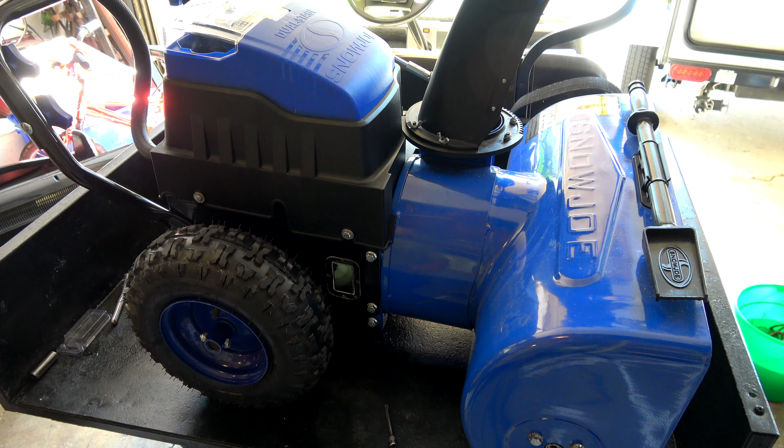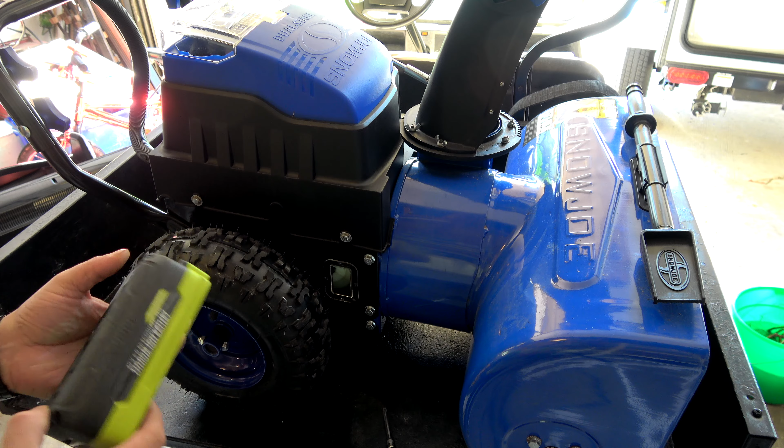We have here today the Snowjoe lithium 80 volt lithium powered two-stage snowblower, model number iON8024-XRP, which is the same as the XR, only includes 6 amp hour batteries instead of 5 amp hour batteries. The batteries are 40 volt, but there's 2 of them to make 80 volts. This 6 amp hour one is actually smaller physically than my old 4 amp hour ones.

So I just upgraded to this, picked it up off Facebook Marketplace. Barely looks like it was used. So I thought we'd open it up and see the mechanics, internals and whatnot. So let's see.

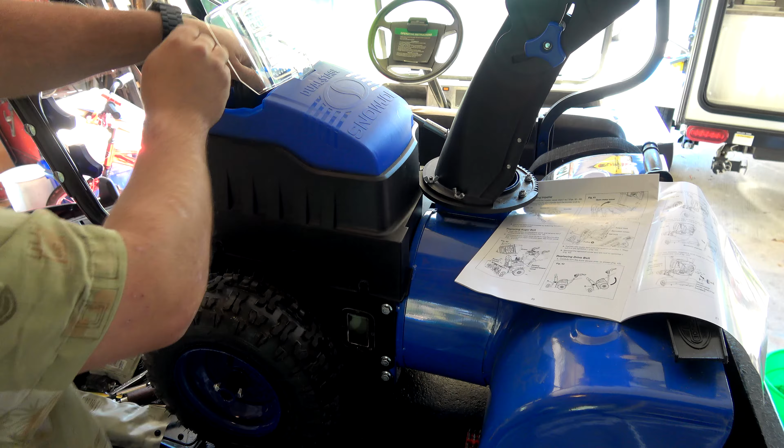I loosened some of these already. I'm interested in seeing how they attach things, how they convert the electric motor to turn the auger and the wheels. In the battery box, the springs that hold or put tension on the battery also have 2 hex bolts, requiring a 5mm Allen wrench or bit to open or remove. The owner's manual calls them screws, so I was looking for screws. I didn't see any screws, I saw hex bolts. They also referred to the bolts on the side as screws, which technically the thread is a screw, but they're not screws, they're bolts. So, remove those.

There you go. And then, now it wants you to remove the chute too, but I'm not going to remove the chute. This is plastic and it's not cold out, so I'm just going to gently move things over that way.

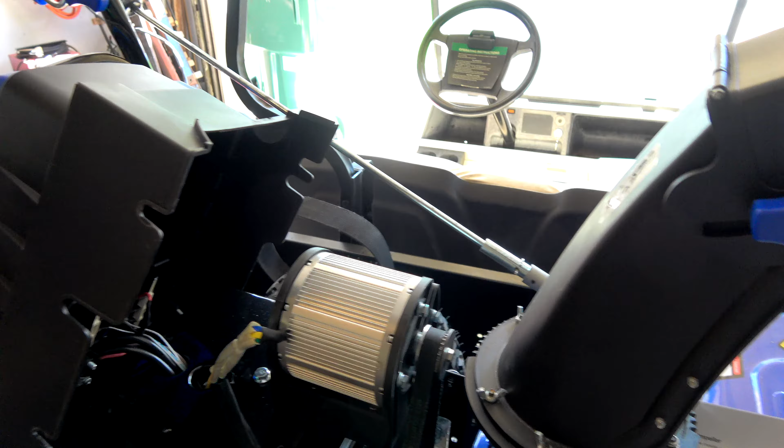Okay, and here we go. We have the different motors. Let's move the camera a little closer here, angle down, get a little more light. Alright, so what do we all got in here?

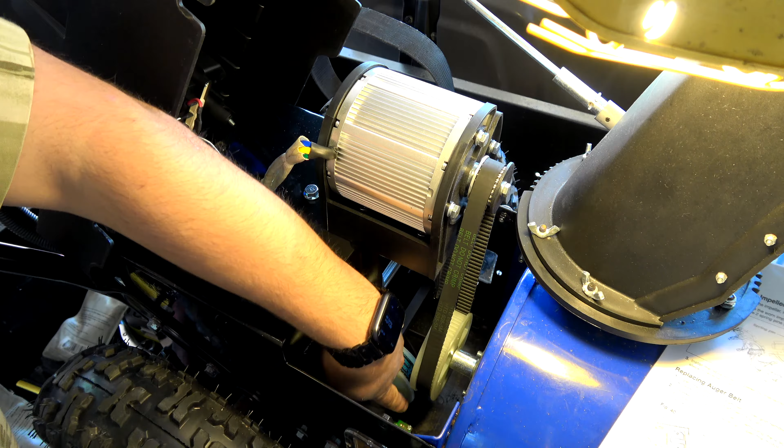Well, they got some pretty blue LEDs on the bottom, which won't come on now because I have the batteries out, which would be these little things right there. There's one on each side, kind of lights up, there's a little clear window here. I guess it's good so you can see if your belts are snapped. This is the motor, which is really kind of a nice motor, heat sinked, and remember it's going to be wintertime, so cooling - even though it's heat sinked, it's not very big heat sinks, but something better than nothing. Plus wintertime, cold, blah blah blah.

The pulley on the top appears to be maybe aluminum or zinc. Pretty good gear ratio there. Oh, it's a stepper motor, permanent magnet.

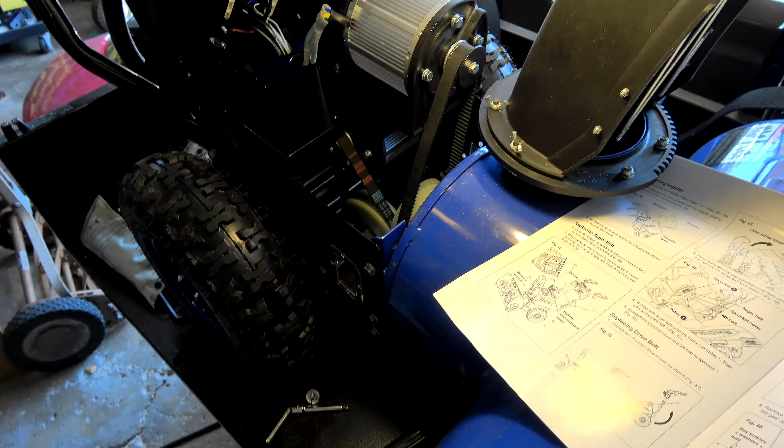There's another motor on the bottom, looks to be of the exact same kind. That one drives the wheels. However, the pulley on the bottom one is a little smaller, different gear ratio, gives you a little more torque. Whereas the top one needs a little more speed for throwing that snow a bit of a distance there.

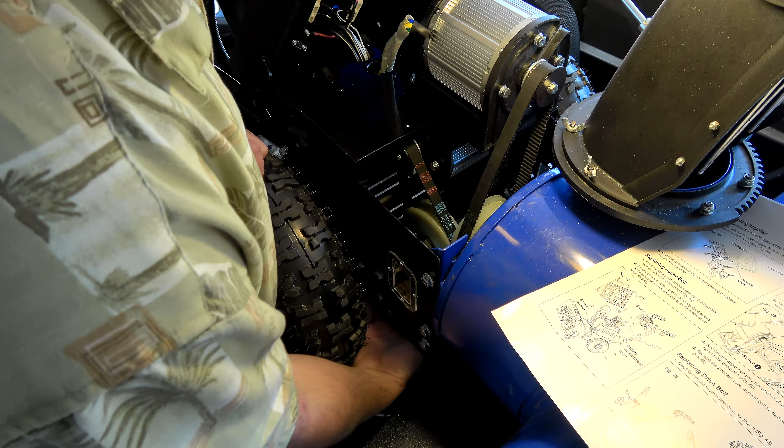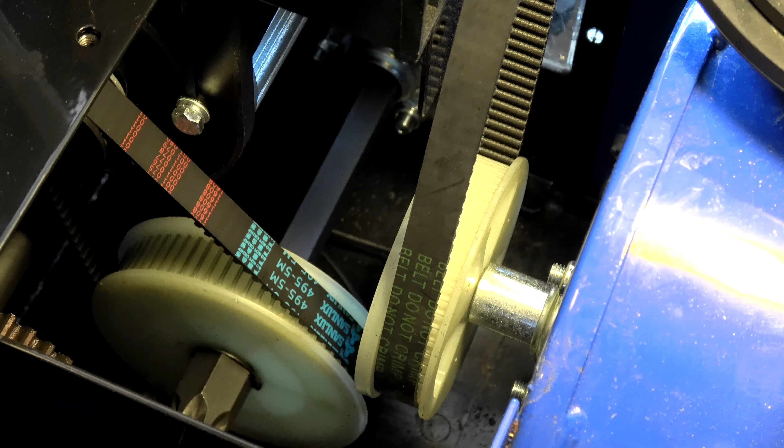There's holes on the bottom of the pan. Now, one thing that I'm not most impressed on, and I'll zoom in here, is the drive pulleys, or the driven pulleys, are plastic. Belt's a little sloppy too, but it is a ribbed belt.

Both of them are. The gears here are plastic, and they are held on by a simple bolt on the auger one. That does not seem like it will last. The bottom one seems to have a massive nut and some bars going through it. Get a good look there - that little green square is the LED to light this all up at night.

Now, the gear that's actually connected to the wheels is in fact metal, nice metal one, but the one going on the belt is plastic. I wonder how long that will last. Looks like some solid connections here, they're also hot glued. Zoom out. Belt replacement, so it would seem for the auger, is going to be pretty simple.

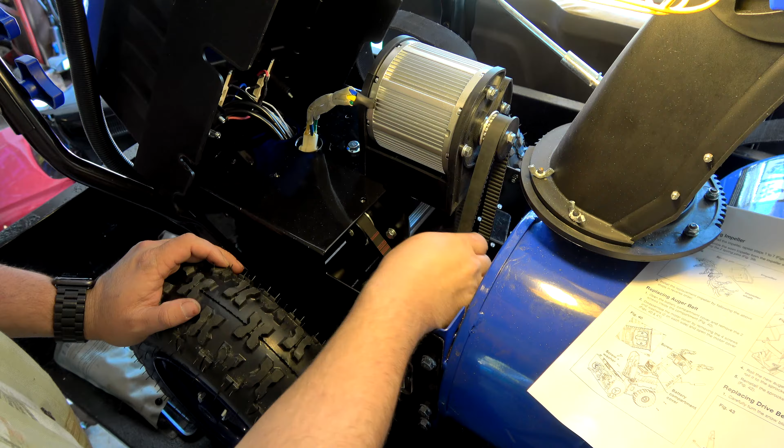Now I saw a lot of complaints about this unit, that the auger after some use will stop working. I can't comment yet, I'll have to wait for a snow day, and today's 66 degrees right now, so it's beautiful out.

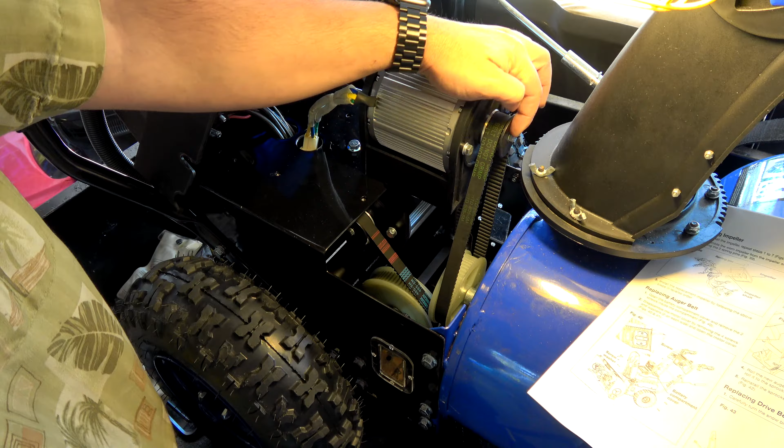So I'll have to wait until some snow falls to test that. Now my single stage Snow Joe also has a plastic gear on the drive belt, which hasn't gone out, although I am seeing complaints about that. What happens is there's a big nut in the middle - the drive one does have it - and if you hit something and stall out the augers, instead of the shear bolt shearing, the metal nut in the center of the plastic pulley or gear strips out and starts rotating, and then it's junk.

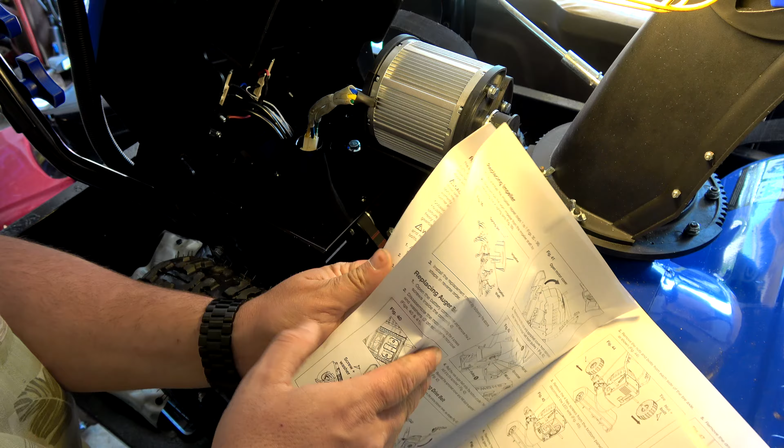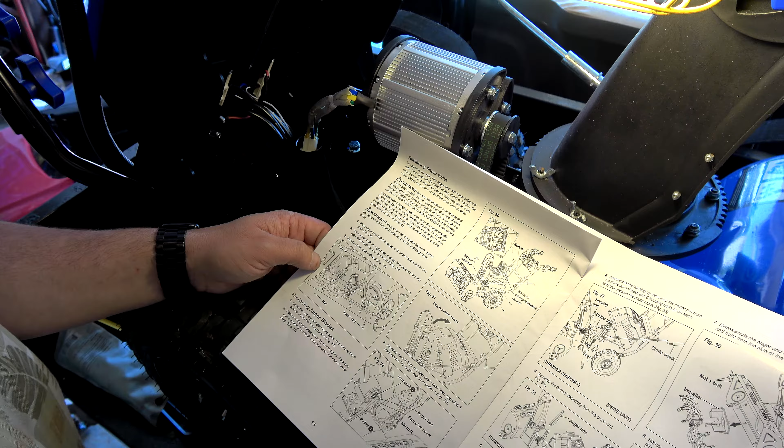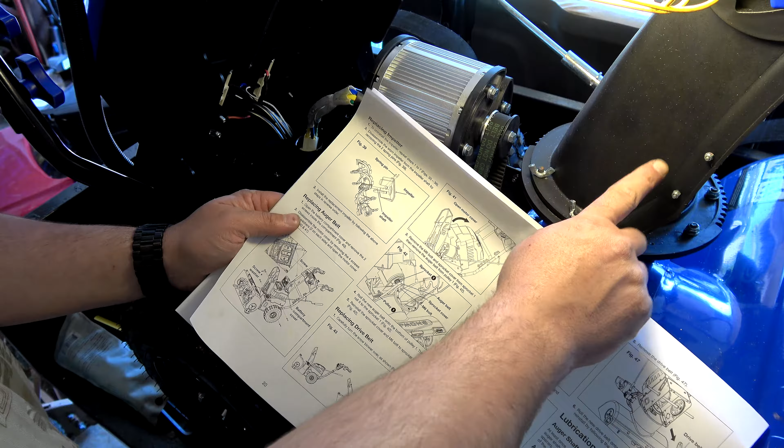We got some interesting things in the manual here. Replacing auger blades - unless you're picking up rocks and a lot of crap, you really should never have to replace those. There's another one that looks to be a pain in the butt. We got replacing impeller, which is what shoots the snow out the chute.

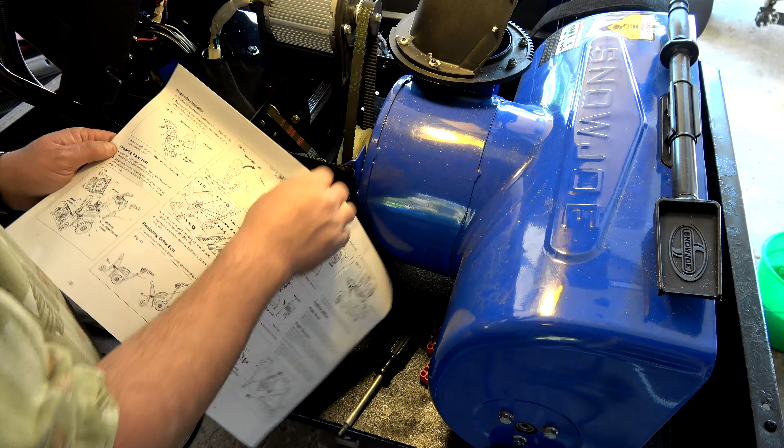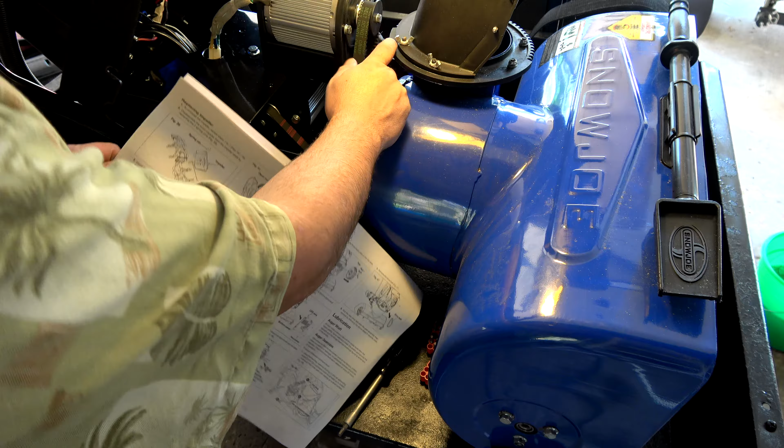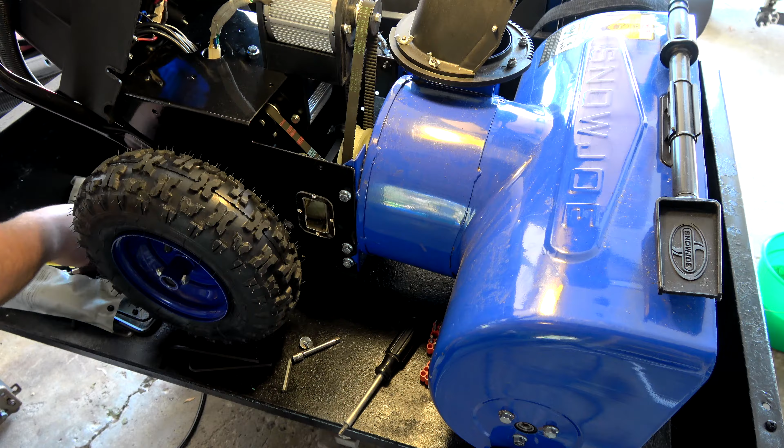Then we got replacing auger belt. That would be this one here, which is pretty darn simple. You probably just remove the M6 bolt - 6 mil bolt with a 10 millimeter head, so a 10 millimeter socket. You can slip that pulley off - oh, it's metal on the outside - slip that off, the belt comes off, put the new one on, back on.

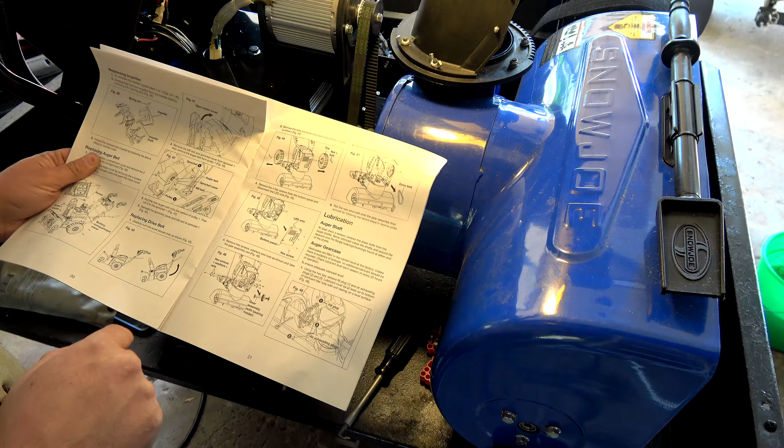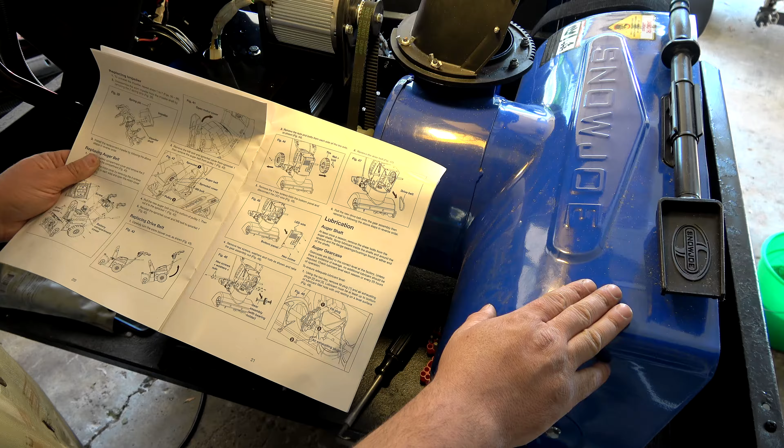The drive belt, that one's a little more tricky, as you have to take the wheels off. Oh, it wants you to take the bottom of this thing. You got to place it up and balance it on the front here. Take the bottom off, pull the sprocket. Yeah, that's a project and a half. Yep, doesn't look like fun.

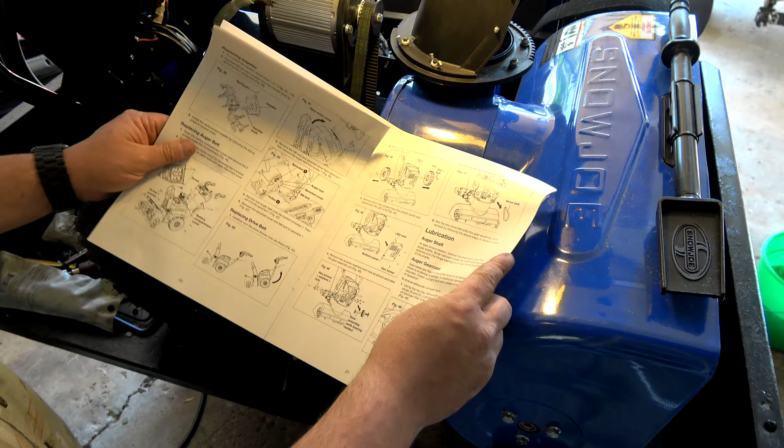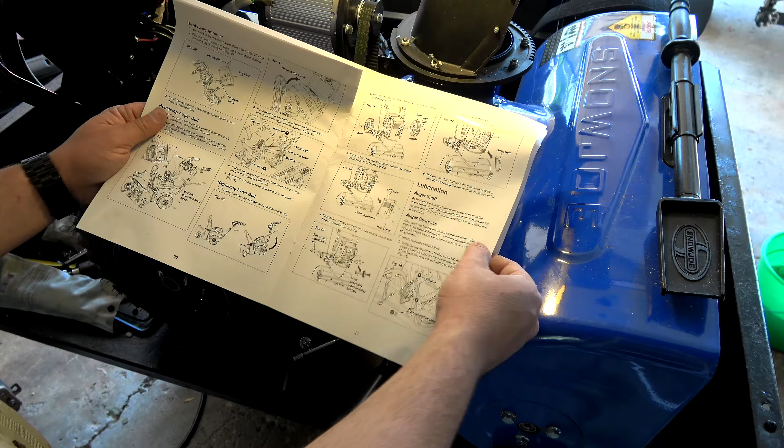And then lubricate auger shaft, auger gear case. Unless you're having a leak, a gear lube leak, you really shouldn't have to touch it. Oh yeah, it even says here, unless gear cases are filled to correct level at factory, unless there is evidence of leakage, no additional lubricant should be required. Check lubricant level every 25 hours, so you can check the level - if it's low, then top it off. Once again, not something you really have to worry about too much there.

Storage. Yeah. So overall, the mechanical construction of this, the front end - that's tried and true, pretty much the same as most two-stage blowers. The motors, well, the brushless motors, these are nice motors - permanent magnet, no brushes to worry about. Both are the same. The motor gears, great. The sprocket for the axle, great. But again, they used a plastic pulley/gear for the auger and a plastic pulley/gear to put on the axle to go from the belt. And that I am not impressed with. If I ever break one, I think I would replace it with an aluminum or zinc one.

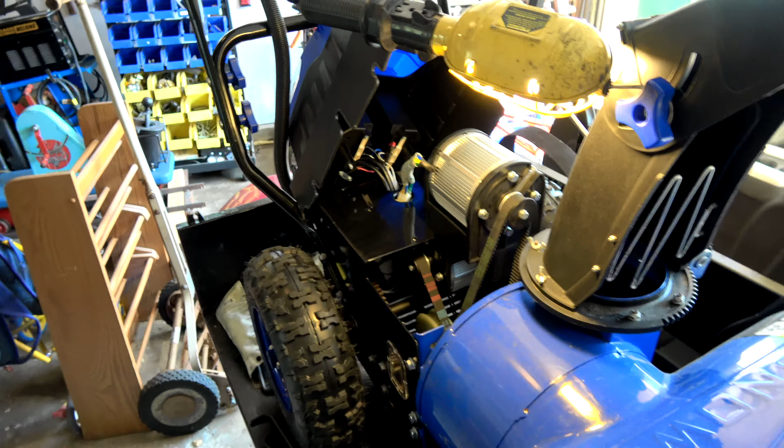Now the electronics, let's see if we can take a peekaboo at some electronics here. I think I'm going to have to pull my camera off the tripod, so bear with me. Come on, there we go. We can turn on - oh whoops, I'm zooming in there, don't mean to be doing that.

Night shot a bit. So there's some of the electronics there. You really probably shouldn't be getting any water in there. Shouldn't be too much of an issue. Yeah, some wire plugs.

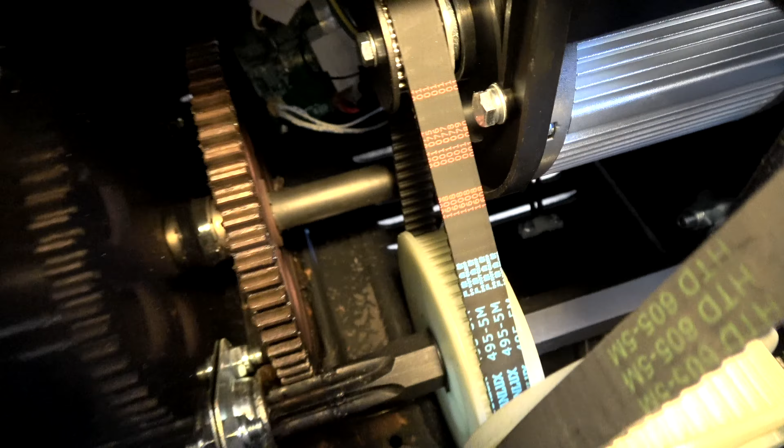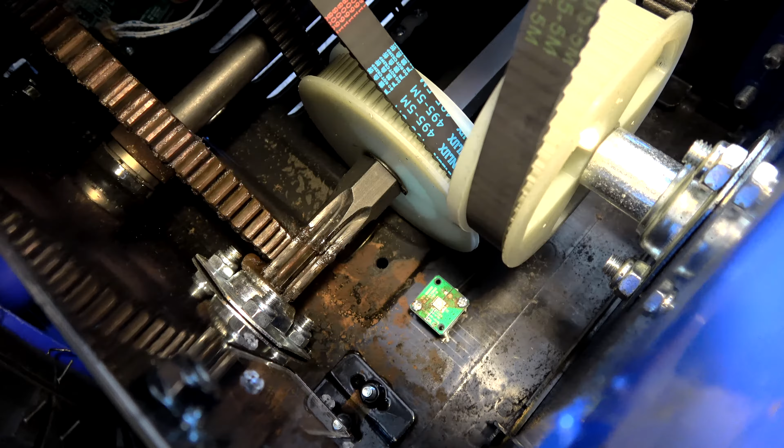She'll look back over here. So yeah, this is a nice big iron or steel, not stainless, gear. There's that plastic one with a snap ring on there. Yeah, I don't see that lasting. I think I'm going to measure that up and see ahead of time if I can just get some.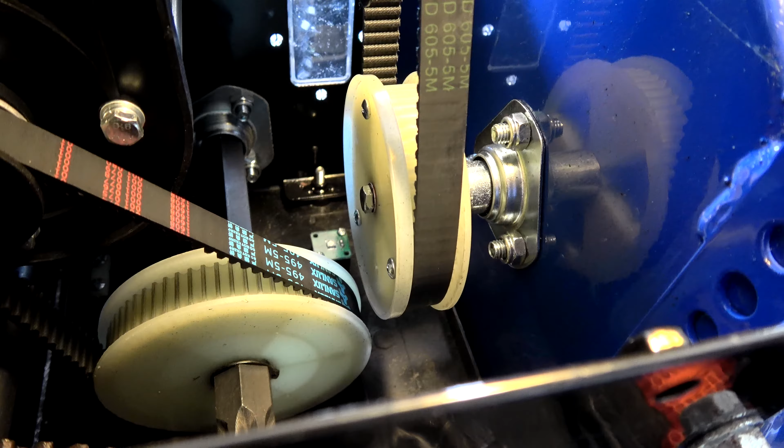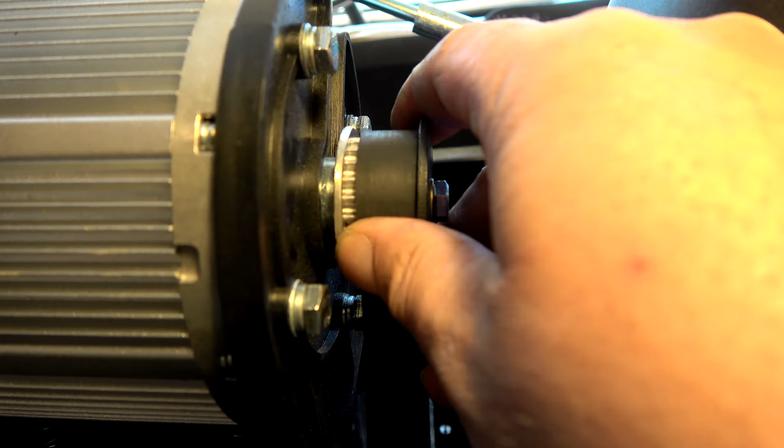I mean, these things should only be maybe $5 or $6 each at the farm supply store. I'll go to Farm and Fleet - there's also Fleet Farm, Tractor Supply Company, Northern Tool would even have them. Beautiful gear on top there. And these motors, oof - total, this thing's supposed to be 2200 watt, so each of these motors should be 1100 watts. And that's some decent amount of power.